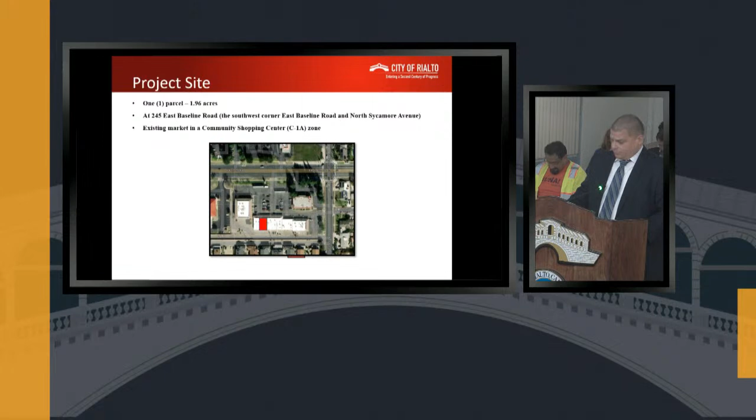The proposed operation will consist of the sale of water and ice, 8 water dispensers with purified water, where customers will bring their own 1, 3, or 5 gallon jugs to collect the water. Customers can also purchase packaged cube or crushed ice. They plan to be open from 10 a.m. to 8 p.m., 7 days a week, with 1 employee on duty at all times.

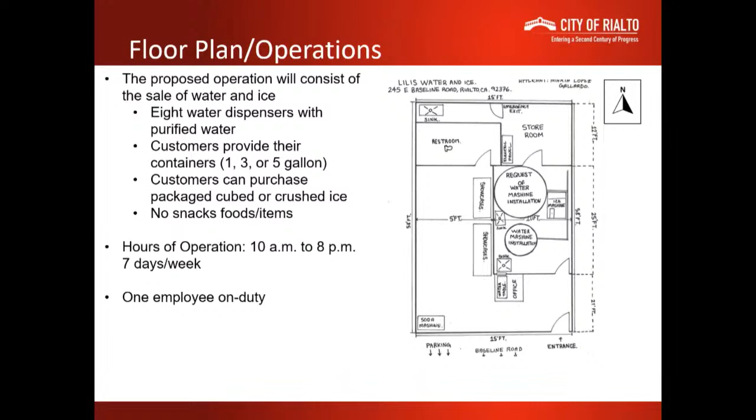For this project, I mailed public hearing notices to all the property owners within 660 feet. This was published in the San Bernardino Sun newspaper, and it was posted on site. We have not received any comments. This is CEQA exempt under existing facility projects.

Planning's recommendation is to adopt resolution to approve conditional development permit number 2023-0014 to allow a water store at 245 East Baseline Road, subject to the findings and conditions therein.

Go ahead and open public comment, then I have a question for you. Jason, the question I have for you before we see if we have any public comments or the applicant, are there any other water stores in that shopping center?

No, not in that shopping center. Do we have a lot of them in that area, do you know? There's one in the shopping center across the street, and there is one in the shopping center catty corner in the northwest corner of that intersection of Sycamore and Baseline. Okay, so we're going to have 3 of them within a quarter mile. Thereabouts, sir, yes.

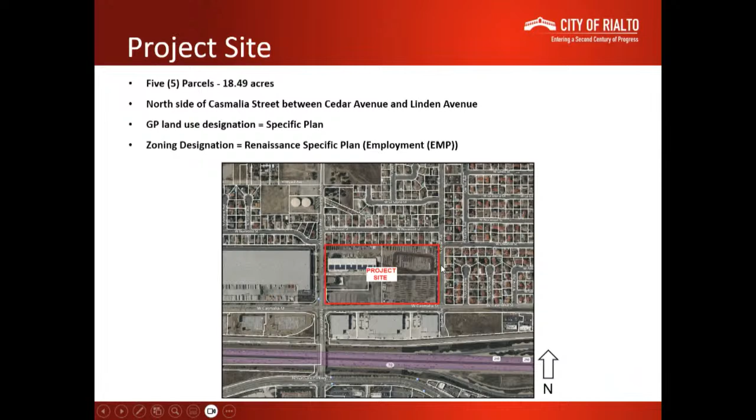The applicant proposes to consolidate those 5 parcels of land into one 18.49 net acre parcel, and then redevelop the site with a 386,312 square foot industrial warehouse building.

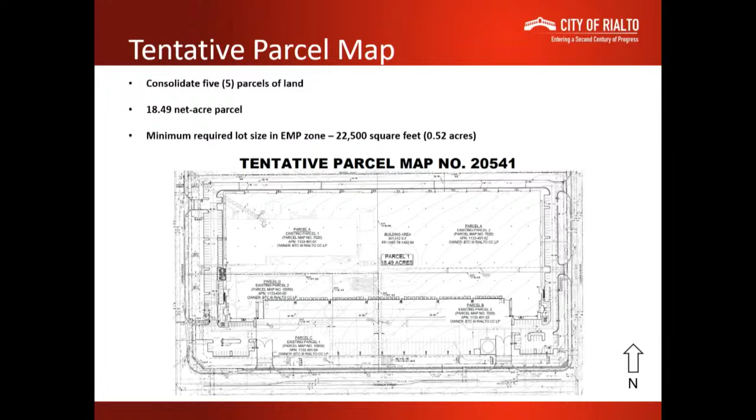This next slide is a copy of the parcel map. The applicant seeks to consolidate the parcels into one parcel. The minimum lot size required in the employment designation is just over half an acre, so at 18 and a half acres, this parcel would greatly exceed the minimum lot size.

This site's truck court will accommodate 107 truck spaces, and there will be passenger vehicle parking areas on the east, south, and west sides of the building, accommodating up to 167 passenger vehicles.

The site has been laid out with consideration of those residences to the north and to the east. Specifically, the applicant has incorporated increased buffers on the north and east, and also on the west side, greater than what are required by the municipal code and the Renaissance specific plan. There is about a 60 to 70 foot setback from those residences to the north, from them to the building.

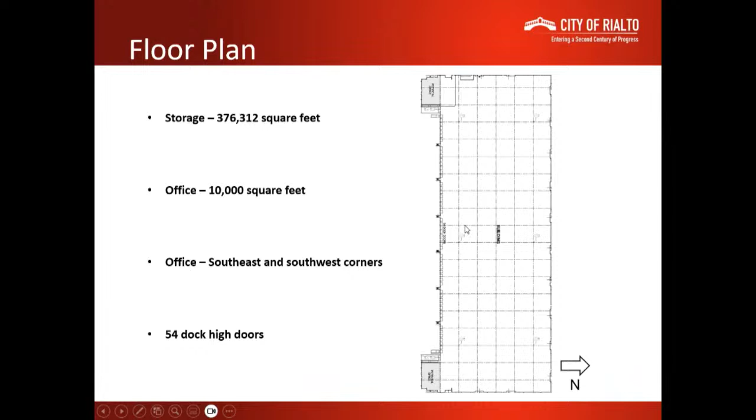Moving on to the floor plan, oriented to fit on the screen. The building will be comprised of 376,000 square feet dedicated to storage space, and up to 10,000 square feet for office space. The offices will be located at either the southeast or southwest corners of the building, or possibly both. The building will have 54 dock-high doors on the south side, facing away from the residents. The building itself will buffer the truck court.

Next, showing a rendering of what the building would look like. This is an image as if standing at the corner of Casmalia and Cedar, looking northeast towards the building. You can see the office facade there at the corner.

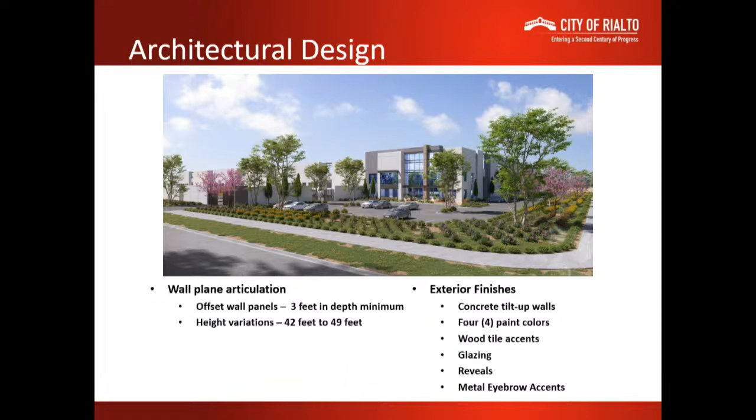The full set of elevations are included in your packet. As you can see, this building will offer a significant amount of both horizontal and vertical wall plane articulation. The building will have significant variations in height, from 42 feet up to 49. The exterior will be built of concrete tilt-up walls, painted in a palette of 4 different colors. The building will also feature wood tile accents, metal eyebrow accents, glazing, and reveals.

This is a landscape slide. As I mentioned earlier, with those increased buffers, the landscape coverage is at a pretty hefty 17.9%, whereas the minimum requirement is 10%. Those come primarily from the increased setbacks: a 30-foot setback on Cedar Avenue, a 40-foot setback on Casmalia Street, and a 50-foot setback on Linden Avenue.

The applicant will also install landscaping in the public right-of-way parkways. They will plant drought-tolerant plants throughout all the planters, trees every 30 linear feet, and an abundant amount of shrubs and ground cover throughout all the planters around the perimeter of the site.

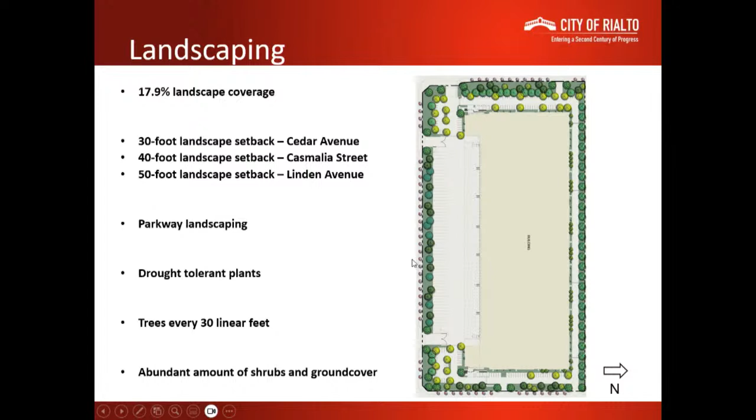Next, moving on to some of the traffic analysis. There was a traffic analysis prepared by Urban Crossroads, attached to your agenda report. The trip generation estimates that this project will generate up to 268 truck trips daily and up to 398 passenger car trips daily. The study analyzed 12 intersections.

The study determined cumulative impacts to 3 intersections, which we've seen on a lot of projects: the Alder Avenue 210 ramps and the Alder Avenue Casmalia Street intersection. The study recommends improvements to get those intersections to an acceptable level of service, including modifying traffic signal timing, restriping existing right-of-way to add additional lanes, and adding additional lanes at the 210 ramps.

The study determined a fair share fee of $284,048. These improvements are actually part of the ongoing Alder Avenue interchange improvement project, which we've talked about on several other projects and is actively under construction now. The applicant will just be paying their fair share towards that ongoing construction project.

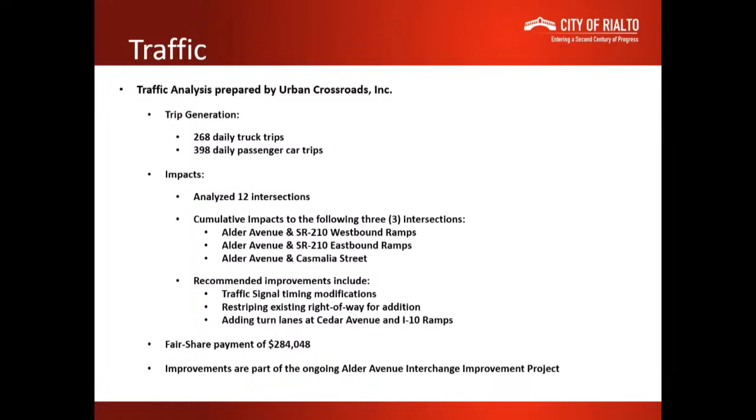Continuing on, in terms of the California Environmental Quality Act, there was an addendum to the program environmental impact report for the Renaissance specific plan, prepared by T&B Planning. The addendum before the commission tonight determined that the project will not result in any new impacts not previously analyzed in the Renaissance specific plan EIR, nor would it cause a substantial increase in the severity of any previously identified environmental impacts. Any potential impacts from the project would be the same or less than those previously analyzed.

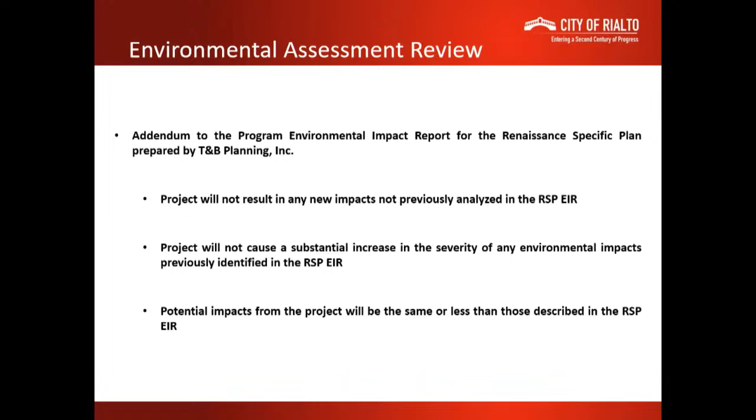Next slide. Additionally, in conjunction with the project, the applicant has proposed voluntary contributions. Specifically, they've proposed a one-time monetary contribution of $175,000 that would go towards public safety and public facility needs in the city. They will also go beyond normal requirements with street improvements, proposing to repave the eastern half of Cedar Avenue along their entire frontage, and the eastern half of Linden Avenue from the northern edge of their project up to the intersection of Norwood. Additionally, in the 25-foot landscape buffer between the residents to the north and the site, the applicant proposes to install 48-inch box trees instead of the usual 24-inch box trees.

So the project before you tonight is consistent with the employment land use district of the Renaissance specific plan. It's also consistent with and exceeds the requirements of Chapter 18.112, the indoor storage facilities section of the Rialto Municipal Code, and is consistent with the industrial land uses to the south and west of the site. As mentioned, the truck court has been placed on the south side, away from sensitive uses to the north and east. Concrete screen walls will be installed around the truck court, and extensive landscape buffering will be provided throughout the site to minimize impacts to neighboring uses. The project will redevelop and improve an existing industrial site with the highest and best use accommodated by the employment land use district.

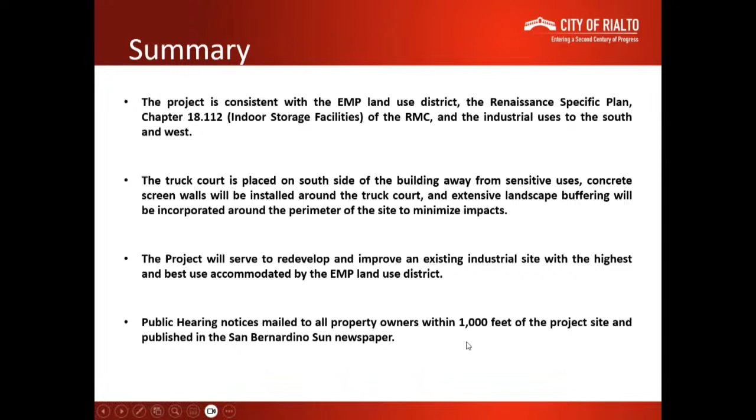There were also public hearing notices mailed out for this project to all property owners within 1,000 feet of the project site, and that notice was published in the San Bernardino Sun newspaper. There have been no comment letters received as of this time. With that, staff recommends that the Planning Commission adopt the resolutions before you tonight, adopting the addendum prepared for the project and approving the tentative parcel map, the conditional development permit, and the precise plan of design. That concludes the staff presentation.

The applicant has provided their own presentation, a copy of which has been provided to each of you, and I can also cue it up onto the screen here whenever you're ready to hear it.

Do you have any questions for Daniel? On the contribution of $175,000, is that inclusive of, or separate from, the repaving of half of Cedar and half of Linden? That's a good question. That is separate. So there will be the $175,000 contribution, plus the repaving, plus the larger size trees.

Thank you. Are the developers the same ones using that property for storage now? Because there's a whole bunch of junk on that property. You know, I don't know that. Maybe we can get that information from them if they're already starting to store some material on site. But all of that will be removed once the building's built? Yes, absolutely. Anything on site now will be removed, demolished, et cetera, to accommodate the development.

Daniel, this area seems to be adjacent to quite a few large warehouses, and there are quite a few others built right in front of it that are empty, advertising for lease. Do you feel we're at an overproliferation of large warehouses in that area, so densely placed right next to those houses? My understanding is that the larger buildings tend to fill up quicker than the smaller buildings. From talking to some of our brokers that do business in town, basically anything at about 100,000 square feet or larger tends to fill up pretty quickly, whereas the smaller ones are where they're seeing a little more vacancy.

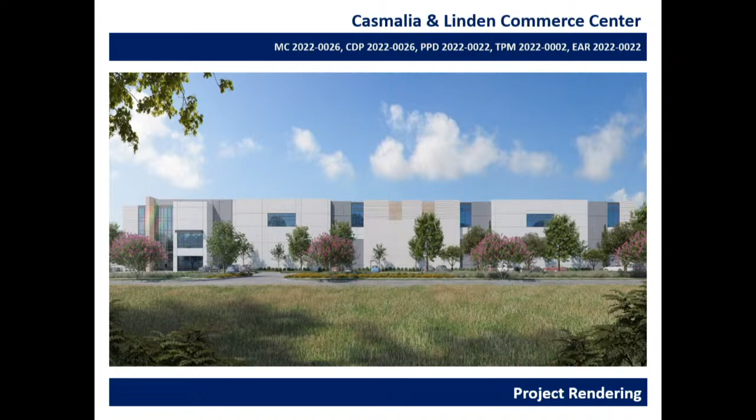The development will be built substantially with union labor, ensuring good wages and local sourcing, including the Laborers International, carpenters, electricians, operators, plumbers, and pipe fitters. Appreciate your consideration and happy to answer any questions you may have.

Question? I have a question. How far away from Ferguson Park is this warehouse located?

I do not have that exact distance. About a mile away? Andy, David, would you have Ferguson Park? No, it's about 2,000 feet, half a mile around. But I don't have it exact. Ferguson Park in Las Colinas, it's easily I'd say 2 miles or more. About Carter High School, right? It's about the same, right, across the street? Yeah, Carter High School is much further north of this site on Linden.

And the reason for that question is because of the buffer zone. Because my concern is with pollution and all that kind of stuff, and the traffic.

I have a few questions. So what is the height of the warehouse viewed from the residence? I know we're buffering it out, I know the distance creates an illusion there, maybe it doesn't look as big.

Yes, the warehouse's internal clearance is 40 feet, so that translates to a maximum ridge height of about 48 feet. The overall area does slope downward from north to south, so there's about a 6-foot difference between the property line and the edge of the building where it steps down.

So there's the existing wall that's back there. We are sensitive to that impact, that's why we're proposing larger trees so we get mature trees a couple years quicker than you would otherwise. They're pepper trees, great for screening, evergreen, with wide canopies.

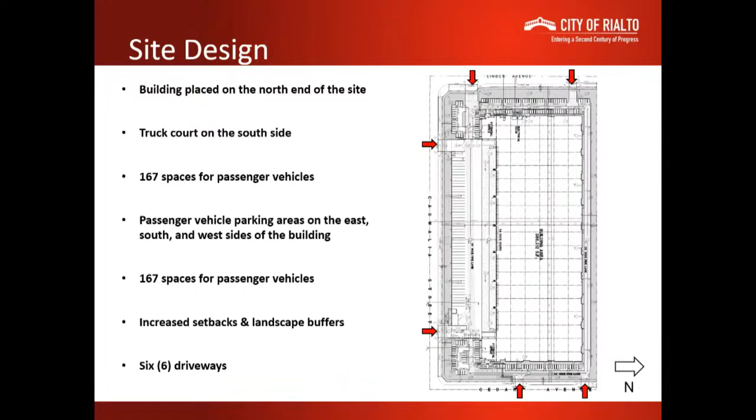You're concerned about the 19-year-old kid with a loud muffler, one car behind the other, going to work? The 19-year-old warehouse worker with a loud muffler driving in front of your house every day — that is also a concern, but that's something I've already experienced. Those empty warehouses, kids like to go play there, and I hear that from my property. My concern is vagrants making U-turns, and if my children are playing outside while a vehicle is on the street, that's what concerns me.

All right, thank you, sir. And especially because I saw the image and the driveway is literally right in front of my property. Okay, thank you, sir. Thank you, Daniel.

Any other requests to speak on this item? No, sir, that was it. Do I have a motion to close the public hearing? Move to close the public hearing. Second.

Do I have a motion to entertain adopting the attached resolution, Exhibits H, I, J, and K, thereby adopting the addendum prepared for the project, and approving the consolidation of 5 parcels of land, APN 1133-491-01, -02, -03, -04, and -05, into one 18.48 net acre parcel of land, and the development of a 386,312 square foot industrial warehouse building on the same parcel, subject to findings and conditions therein. Second.

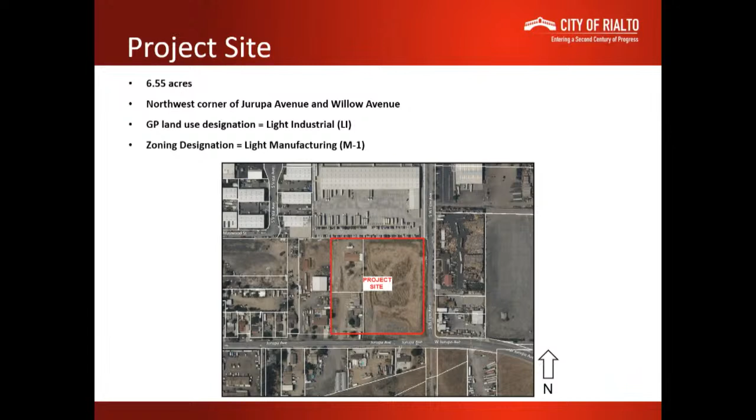What the applicant proposes to do is develop this site with a 119,908 square foot industrial warehouse building, and install associated on-site and off-site improvements. The building will accommodate various storage and distribution uses.

The site will also have landscape planters around the entire perimeter of the site and the building, with the exception of inside the truck court. Additionally, the building will have screen walls around the entire truck court and all along the west property line to divide the site from existing residential uses in the county's jurisdiction.

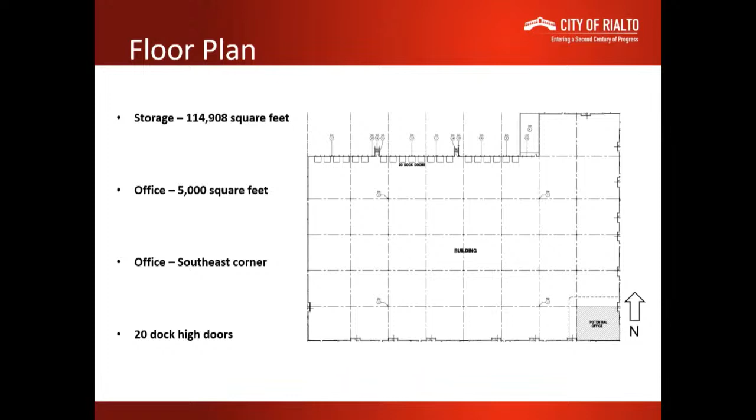Looking back on the floor plan, and the shadows on the elevations, the building has significant horizontal articulation with recesses of a 3-foot minimum depth to provide relief along those wall plane expanses. The building also has height variations, ranging from 40 feet up to 44 feet, again to break up the height along those wall planes.

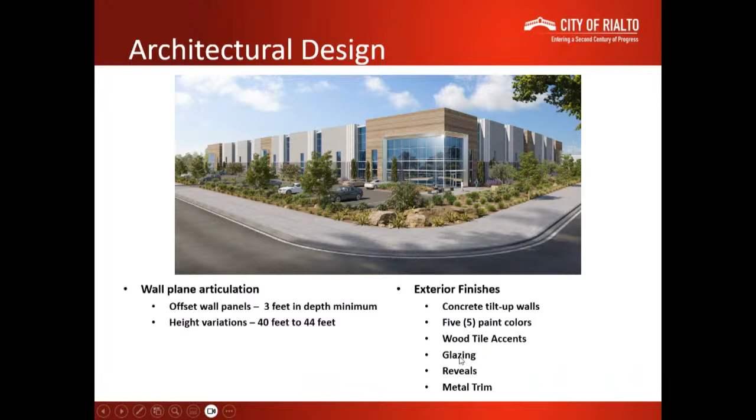The building will be of concrete tilt-up wall construction, with a palette of 5 colors painted throughout. The wood tile accents will be featured not just at the corner but throughout all the elevations, as you can see on both sides of the rendering, along with generous amounts of glazing on all sides of the building, reveals, and metal trim.

That landscape coverage is coming primarily from a 45-foot landscape setback along Willow Avenue, and that is there specifically due to the height of the building, so that they meet the setback requirement of the municipal code.

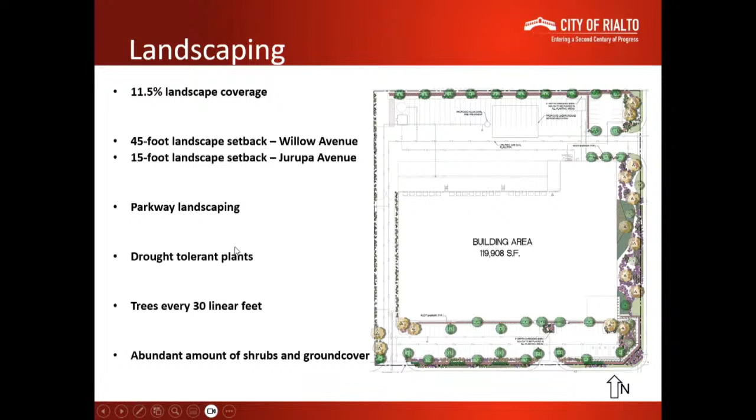And then the 15-foot landscape setback on Jurupa Avenue, again, to meet the requirement of the municipal code. The applicant will also install parkway landscaping within the public right-of-way parkways on both Jurupa and Willow Avenue. They'll plant drought-tolerant plants in all of these planters, trees every 30 linear feet, and shrubs and ground cover throughout all of those planters.

There was a focused traffic study prepared for this project by Kimley Horn and Associates that is attached to your agenda report. The trip generation within that study estimates that the project will generate up to 205 vehicle trips daily. Broken down, that would be up to 82 truck trips daily and 123 passenger car trips daily.

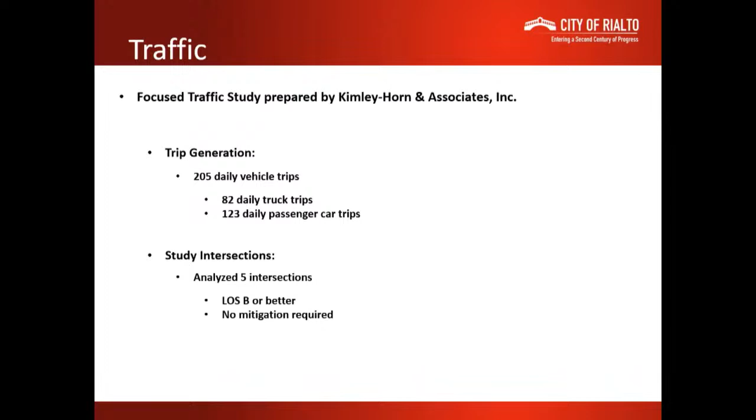The traffic study analyzed 5 intersections, 2 local intersections, and then the 3 project driveways. The study concluded that with the project and the existing trips in the area, all those intersections will operate at a level of service B or better. That exceeds the city's requirement of LOS D or better, and therefore no mitigation is necessary or required for any of those 5 intersections.

In terms of California Environmental Quality Act for this project, there was an initial study prepared by Kimley Horn and Associates. The study determined that the project will have a less than significant impact on the environment with the incorporation of various mitigation measures.

As a result, a mitigated negative declaration has been prepared, and there's a mitigation monitoring and reporting program attached to your agenda report that details the various mitigation measures. The initial study mitigated negative declaration was circulated for a 20-day public comment period from August 25th, 2023 to September 14th, 2023. No comment letters were received during that period.

The project before you tonight is consistent with the M1 zone. It meets or exceeds all the development standards of Chapter 18-112, the indoor storage facilities section of the municipal code, and the city's design guidelines, and it is consistent with the existing industrial uses to both the north and the east of the project site.

The site has been laid out specifically to place the truck court on the north side so that it faces away from the residents to the south and to the west. There will be concrete screen walls installed around the truck court, and extensive landscaping will be planted around the perimeter of the entire site to help minimize impacts to those surrounding areas.

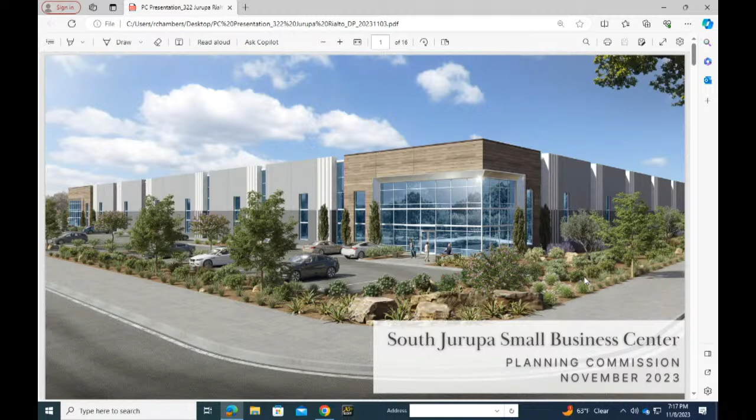Just before we jump in, a little bit about Dedeaux Properties, the company. We've been around a long time. It's a family-owned business and has remained a family-owned business for well over 60 years, probably going on 70 now. We have a large presence throughout the Inland Empire in terms of property that we own and different jurisdictions that we've invested in. Traditionally, we are long-term holders of property, so we do like to build relationships and trust with the various communities that we invest in, and remain committed to long-term partners.

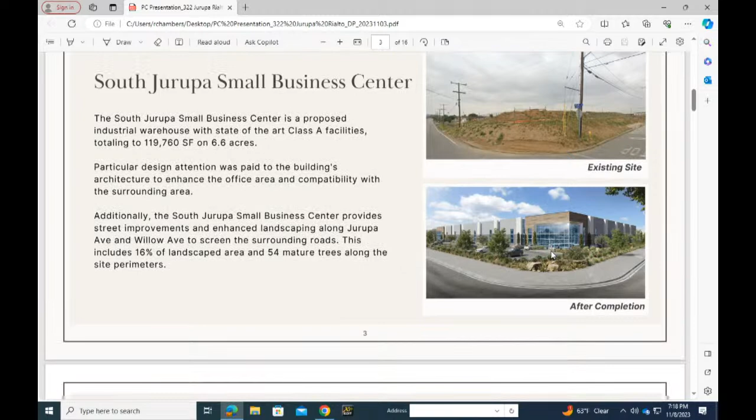Just briefly, I'll run through a few design features we tried to incorporate here. First off, building orientation is very important. We tried to make sure the docks are facing away from the street and any residents that would be impacted, and oriented the traffic away from the neighbors as well. So the main access point is intended to be off of Willow into that truck court area, and the autos would come off of Jurupa Avenue.

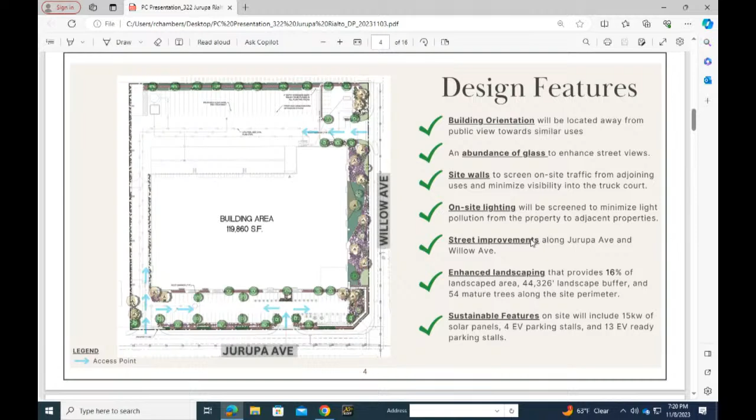A few other things we tried to incorporate: enhanced landscaping along the frontage. What we're proposing on Willow Avenue is going to be an amenity to the community. We've also tried to incorporate several sustainable features, including 15 kilowatts of solar panels. We're going to be doing some EV charging, with about 13 EV-ready parking stalls as well.

So quickly, in terms of site access and circulation, the northernmost driveway is intended to be the car and truck point of access, mainly into the truck court, and that would be the main point of entry for any trucks. The entries off of Jurupa would be mainly autos, but the one entry on the far left would be car and truck. Those are just a few different views from various angle points.

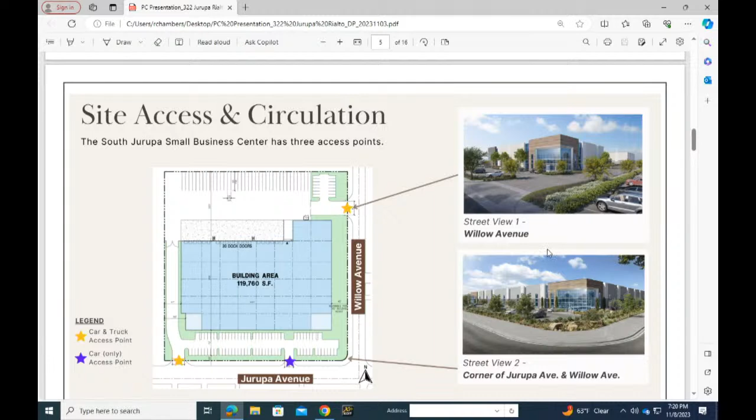Quickly, as Daniel mentioned, this is compatible with the surrounding uses and does fit within the M1 zoning. So we do feel this use in this location is appropriate and right for the area.

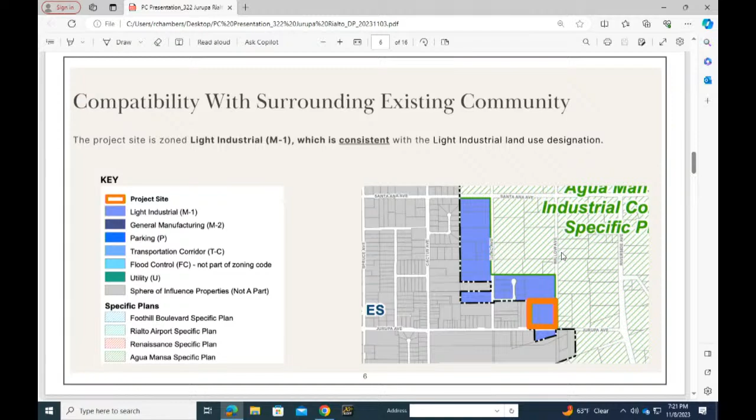In terms of truck routes, naturally the location of the site lends itself to quick access to the truck route going up South Riverside Avenue, and also going north on Willow Avenue to get to the freeway, ultimately leading to the 10. That route would all be through industrial products, so it wouldn't be going through any residential areas. We feel that function is appropriate, and no traffic would be going through any residential areas.

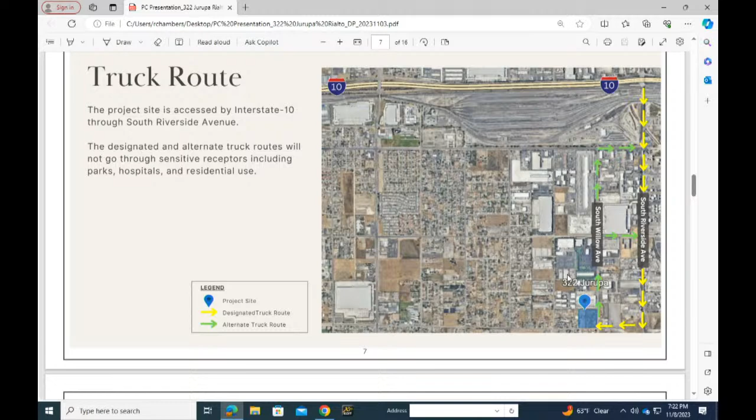Just a few things in terms of sustainability, Dedeaux Properties is committed to working towards a greener future. As you heard in an earlier presentation, half of all trucks in California are going to be zero emission by 2035, and the electric truck mandate approved by the California Air Resources Board requires that all trucks in California must be zero emissions by 2045. As I mentioned, the project will have solar panels, we'll be installing EV chargers at this facility, and we'll be restricting vehicles and trucks with idle restrictions to limit any air quality issues, as well as installing drought-tolerant landscaping.

Just a few brief community benefits: this facility will be providing around $330,000 to transportation facilities, $80,000 to the Colton Unified School District, $14,000 to local parks, and approximately $17,000 between fire and law enforcement.

for the project, and we had quite a bit of support, actually. So with that said, just to end, we look forward to expanding the relationship in the city and the community. We're proud of the development and proud of the design that we've proposed here. We hope to get approval here this evening, and if you have any questions, we have our A&E team and consultants here to assist. Thank you.

Any questions, Stan? Do you have a tenant? We do not have a tenant, no. All right, thank you, sir.

Do you have any members of the public who'd like to speak on this item? We have two speakers. Kenny Lundgren.

Hello, sir. If you could please provide your... Kenny Lundgren, I'm at 19598 Jurupa. We are the property directly to the west of the warehouse. We're not here to bash it or oppose it. We have been in talks and communication with the developer. However, we do have some concerns, and more have been brought up after seeing this presentation.

So I'm going to just name them off so we have a list, and then I'll go down them. One is the wall that's going to separate the properties between our residential and their commercial driveway, especially that westerly driveway — our patio is probably from here to you gentlemen, from that driveway where the wall will be. Also the truck entrance and exit, we'll address that as well, time of operation for the businesses, and then security cameras and windows on the southwest corner that is two stories, and where security cameras will be placed to keep our privacy.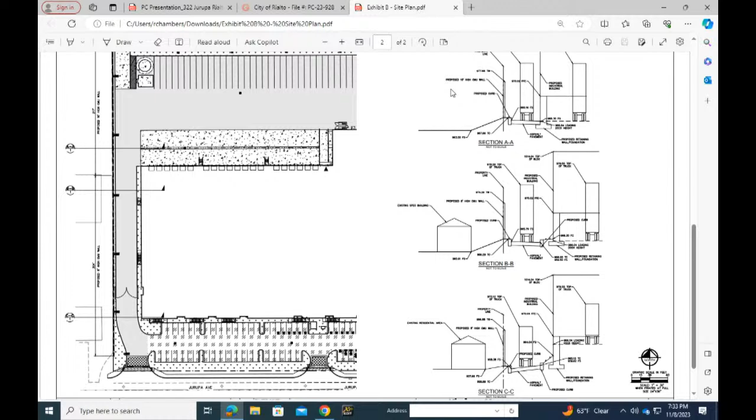Yeah, I think regardless, I want to recommend, if after we're done, consider that recommendation. So we have 3 cross-sections here. Let's zoom in a little bit. Oh, that's not zoom, excuse me. No, that's search. Where's it? There we go. Okay, so we got A-A, B-B, C-C.

Okay, so let's start with C here at the bottom. C is a cross-section that's essentially at the neighbor's house, and the edge of the building. And so here on the bottom right, we can see the cross-section showing the top of the wall and then their finished surface. And we probably want to ask the civil engineer to come up and let us know, because it does say not to scale here, what that height relative to the top of the trailer will actually be.

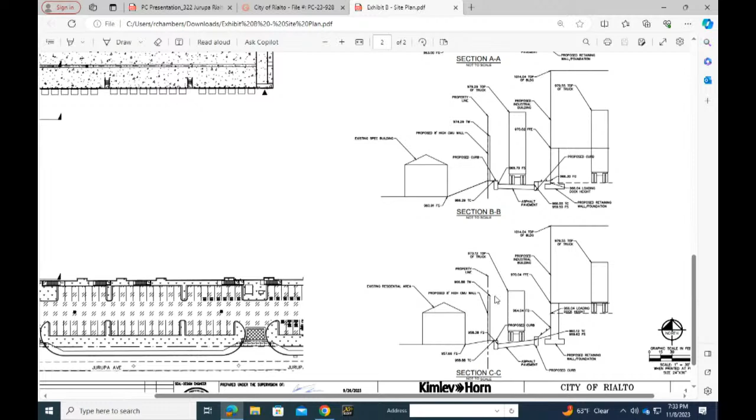And then we can see as it goes further north, section B-B, which is a little further into the property, close to the rear of the building. Now that wall is shown as a little lower relative to the height of the truck. It actually has some elevations shown there.

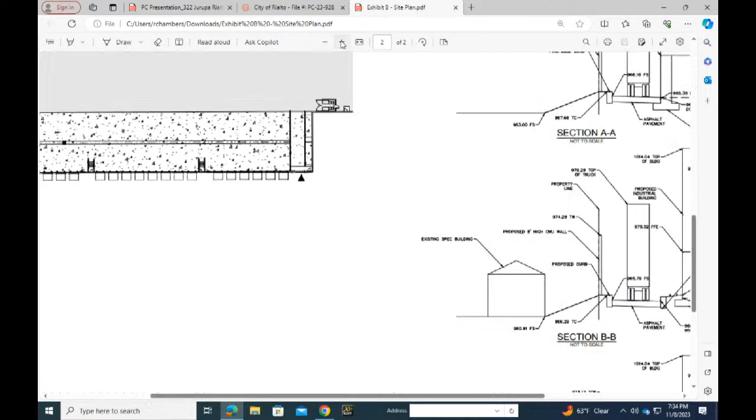It says that the top of the wall, let's go back to the lower one nearest the house, would be at 966.88, so essentially 967, and the top of the truck at 973. So basically the wall will be 6 feet shorter than the top of the truck trailer.

Okay, and then continuing further north, 974 to the top of the wall, 979. So actually here the wall is getting taller relative to the truck.

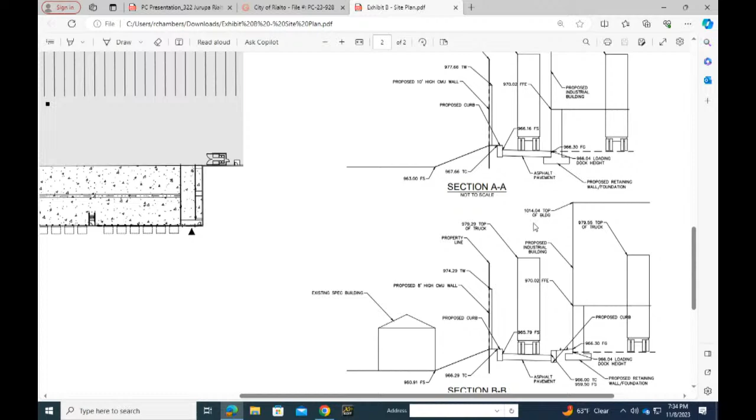Here it's 5 feet. So Daniel, on the other side entrance there, Paul made mention we could not allow truck traffic on that side of the road, the building, but the other side, is there residents on that other side as well? I can't read the map. On the east side? Yeah.

Let's go back to the original staff presentation. I think it'll show it better to the commission.

Okay, so yes, this lower left driveway is adjacent to the resident here in the audience tonight. What about the other one? Is it adjacent to residential? This driveway here is across from strictly industrial uses, no residential uses on Willow Avenue east of the site.

And what about the other one down there, not next to his residence? There's residents there too, right? So this would be a passenger vehicle only driveway. Right now, as proposed, there are two truck entrances that could accommodate trucks.

We have a solution to propose as a recommendation. The other two questions I have are: lighting shining on his residence, how do we mitigate or avoid it? Second, limiting cameras to their property only, not on his residence. And third, hours of operation on the warehouse. What were they again? Did we have any proposal on that?

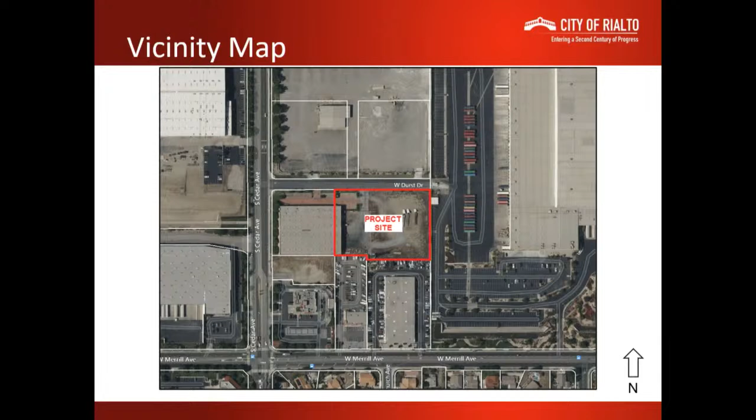The site is 1.87 acres. It is on one parcel, and is on West Durst Drive.

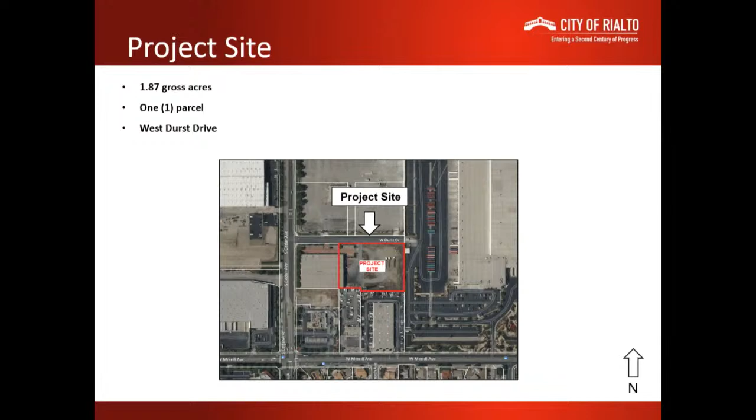You can see this proposed site plan for the site. On the north side, you can see Durst Drive. They will improve the south side of Durst Drive, including the street improvements, parkway, sidewalk, and everything else on the south side of Durst Drive.

Trucks will enter on the shared driveway to the west of the building. On the southwest portion of the building, there's a small entryway where the trucks will go back and forth to each building. And of course, parking will be on the south side.

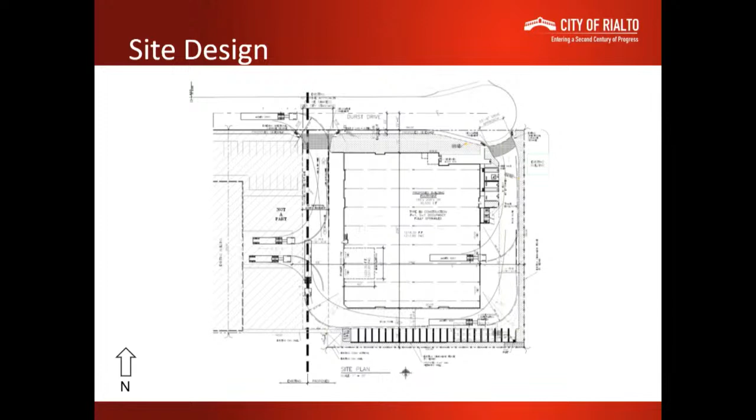The applicant's proposing 11% landscaping around the building on the southeast corner of the site and on the west side of the site.

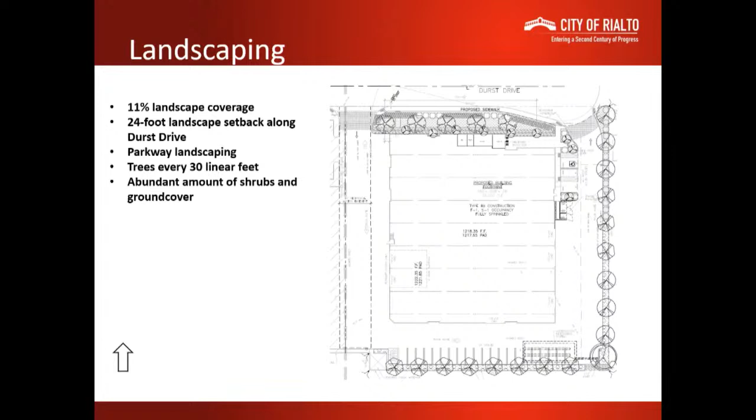The applicant is using a variety of different colors for the site, breaks, and elevations for the small building. As mentioned earlier, it's a 36,500 square foot building, which is about 80% of an acre, just under an acre.

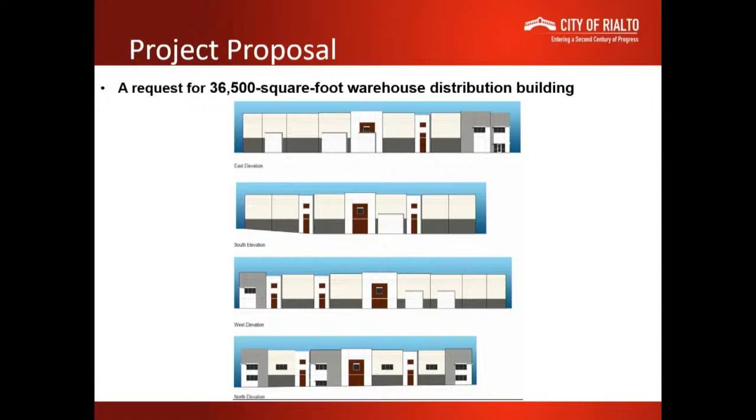Staff recommends the Planning Commission approve the project as noted in the staff report and shown before you tonight. The applicant is available to answer any questions, as well as staff.

All right, do you have any questions for staff? I don't either. Well, I'm sorry, I do have one. On the resolution, there's the second resolution. It talks about some fees paid to the school district. I wanted to know what those fees are, for what purpose.

The development impact fees, Commissioner, are paid for every project. That might have been listed specifically in this resolution. But there's school fees, traffic fees, police fees. Those are just some of the fees that are required for the applicant to pay.

Okay, that was my question, I wanted to know what. Mr. Chairman, if I might add, those school fees are authorized under state law, so school districts are able to require those. Okay, it's not something imposed. It's by square footage, right? I believe so.

Okay, thank you. I will open the public hearing. Do you have any requests to speak on this item? No, sir.